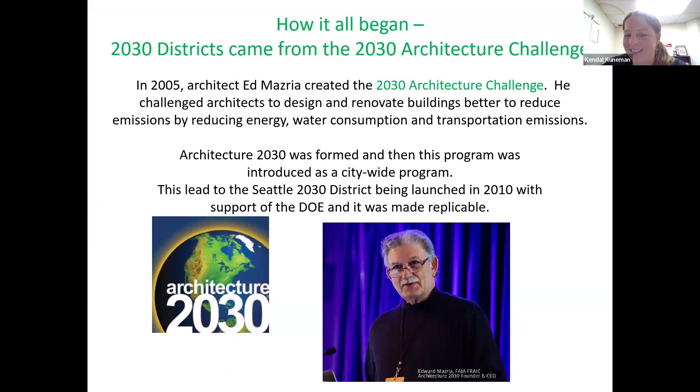There's over 602 million square feet that have committed to reducing their carbon emissions by half by 2030 that are involved in these districts. In Michigan, we are really starting to lead the way. We now have 5 districts. Ann Arbor just recently expanded to Washtenaw County. Detroit, Grand Rapids, and Lansing is emerging.

And just a little bit more information again about us. We are a private-public partnership, and we have 3 different membership types. So if there is a building located in the city of Detroit, that building owner or manager can enroll their property into our program as a building member. We also have professional stakeholders like the 3 that are here today to present, who support us financially, support our mission. And we also have community stakeholders, and these are other like-minded nonprofits in the city of Detroit that we partner with. So there's 3 different ways to join our program.

We somewhat recently launched a new program, which is an EV charging station pilot. And this is currently available to our building members. So if you are interested, you can reach out to us to get information.

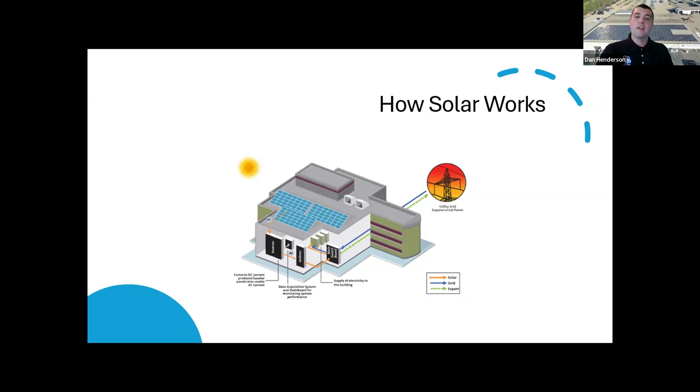From there, that power, like any form of electricity, I always like to joke, it's lazy, right? It's looking for that least path of resistance, i.e. what load or consumption can we satisfy or negate on site. So during those daylight hours, we want this solar array to produce as much power and send it into the building and be that primary source of power, with the idea that the utility during that daylight hour would then be your supplementary source. Again, site constraints do impact what kind of offset we can attain or realize. So every site is certainly unique. Depending on system size, there's also the ability to sell that excess generation back to the utility. We will unpack that a bit further, but that is what's known as distributed generation, which Michigan participates in.

Why are more and more Michigan business owners turning to solar? The benefits are compounding, right? The largest, and the one we see as most attractive, is going to be, hey, I want to mitigate my rising operational expenses. I would envision that the electric bill is probably one of the larger items on your balance sheet, and it's not one we like to pay. We like paying our employees because they're turning profit, right? They're going home and supporting their families, but that electric bill is ever increasing, even with the efforts that we're seeing. I would even challenge a lot of you to look at your homes. We're getting more energy efficient appliances and LED lighting and numerous things, but yet our electric bills are still increasing. It's as a result of that ever increasing rate.

We're seeing sustainability become a huge impact, right? So now we're finding that this is one of the larger low-hanging fruits of a carbon offset you can achieve by going solar. But I think one thing that is often missed is the marketing. I've touched on this before, and I still think it has an unbelievable opportunity to really separate and differentiate yourself. I've used the example in the past, we're working with a brewer up in Mount Pleasant, and their goal was, because it's a college town, I want to have the greenest green beer on St.

Patrick's Day. And I drank that beer.

But there's a lot of other things here we see, with compliance being another one, right? My largest customers are encouraging that they have sustainable suppliers. I've heard things like, hey, if I don't go sustainable or renewable, I'm not going to lose my relationship with my largest customer, but I may not be awarded new contracts. So we're seeing a definite evolution here as a direct result. Again, I touched a little bit on this: it's a large opportunity to reduce your carbon footprint.

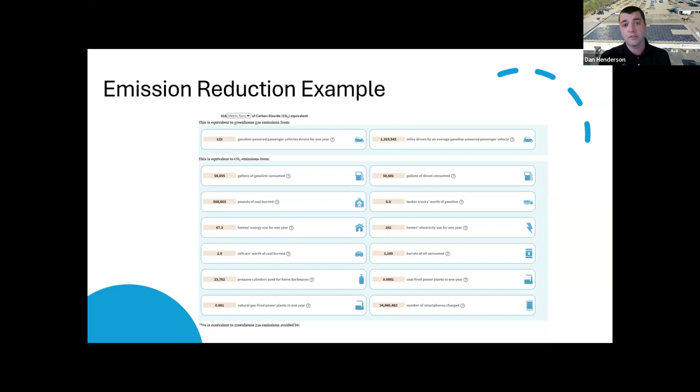We now have the ability to participate in distributed generation up to 550 kilowatts AC. This means, where we were going up to 220 systems, we can now see a system installed at closer to 800 kilowatts DC and still be able to participate and sell that excess generation back. Because one thing we observe here in Michigan is heavy seasonality. The winter months, January, February, November, December, those 4 months equate to about 15, maybe 20% of your annual production. So we're optimizing these for the spring, summer, and fall seasons.

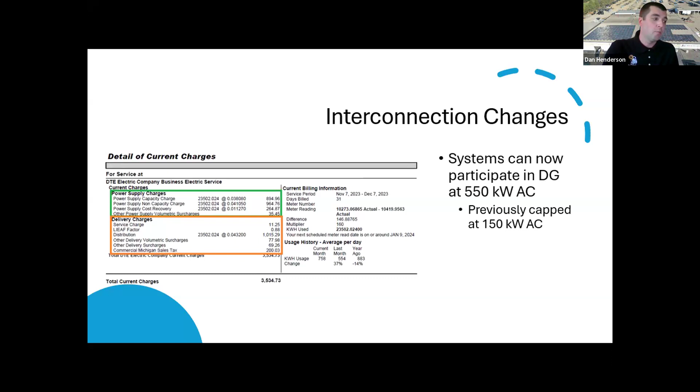Well, now the credits that you generate can also be applied to the delivery charge. Anywhere that you see a volumetric charge, in this case the 23,502 kilowatt hours, we can first and foremost reduce the demand from the utility because you're sourcing it on site, and any excess that you can't consume in that moment will be sold as a credit and further reduce this electric bill. So what we're going to start to see is smaller banks of credits, because we're ultimately going to observe smaller electric bills. So this is good news all around, because more of your power you can apply to your billing.

Now the incentives. Solar has always been a pretty incentive-friendly project. We're really excited. There's a federal depreciation, typical 5-year schedule, a state level depreciation, but the one we're most excited about was, thanks to the Inflation Reduction Act, a reinstatement at 30% as your baseline tax credit. This is for any for-profit taxable entities. There is a direct pay incentive, which is available to the 501c3s, the non-taxable entities, houses of worship, that we're very excited about.

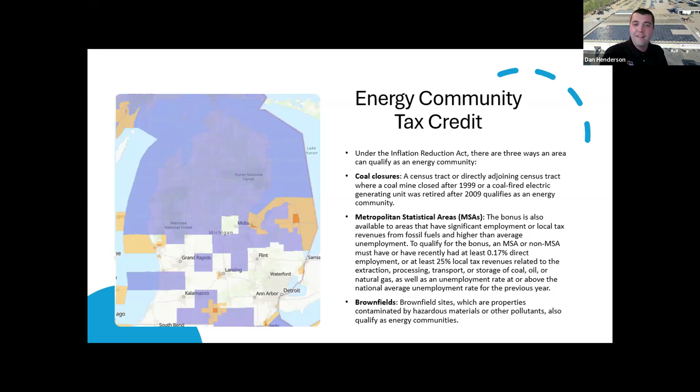We are extremely excited that there was recent guidance released, just a few weeks back, that actually expanded this credit. And now we've added 7 additional Michigan counties: Monroe, Wayne, Oakland, Macomb, Livingston, Lapeer, St. Clair. It's really exciting to go back to some of the customers I have been speaking with and see the impact on the pro forma itself by adding this additional incentive. This is compounding on the 30% and depreciation that are already in place.

It is also important to know that this list of those that would potentially qualify for future years is dependent on those local unemployment rates. So we could see some of these drop off or get added. It'll be interesting to see how these look going forward. But we're really excited to see this credit expansion. It further supports the development and growth of renewable energy here in Michigan.

I'd be remiss if I didn't end with a case study. So I'd like to share Willie's Overland Loft. I'm really excited to share this one, because as Kendall had mentioned, we were at the Michigan Energy Summit and Battle of the Buildings in Grand Rapids yesterday, and our friends over at Willie's Overland Loft were recognized for further reductions since we've installed solar, with all their positive efforts. So kudos to that team. It's really great to see all that they're doing and continue to do.

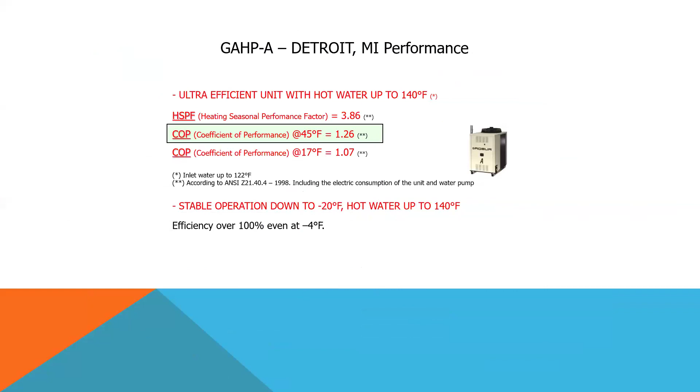This pilot information comes from natural gas energy providers in Northern Illinois, which is very similar to our climate in terms of heating degree days. They wanted to try a heat pump in a northern exposure, where heat pumps aren't typically applied. When you say heat pump, they don't always have to be geothermal, they can be air to water, water to water, or whatever. Ours happen to be air to water, and they run on natural gas. When we compare the degree days of Rockford, Illinois, where they did this testing, to Jackson, Michigan, they're very similar within a few hundred degree days of each other, so we thought it would be a relevant comparison.

Why do I want to share this information? Right now, everybody thinks electrification of everything is going to be great, and it will be when we get clean power, but right now we're still fairly dirty. So we want to talk about what today's reality looks like. If we put a gas heat pump in Detroit and let it run here, we can get water as high as 140 degrees out of it, hot enough to heat most buildings if properly configured. You can see we're above 100% effectiveness with the energy we're consuming, electricity and gas combined, achieving a positive impact. We're generating power through the use of ambient energy in the air with natural gas and a small amount of electricity, and in this test they were comparing different technologies.

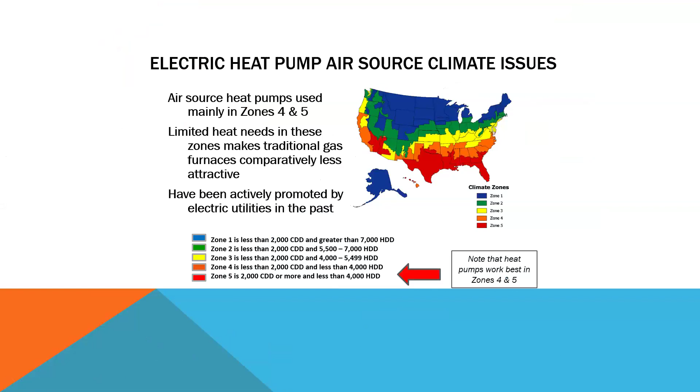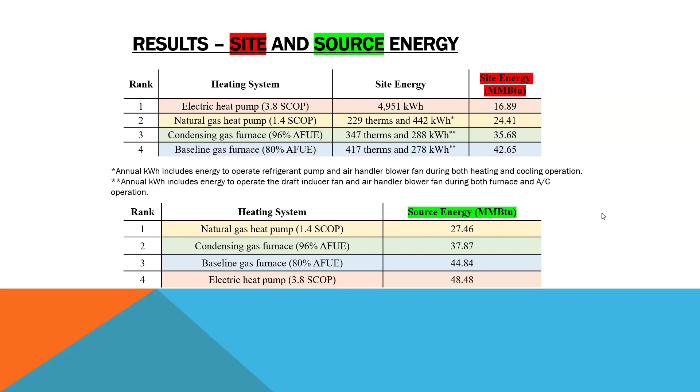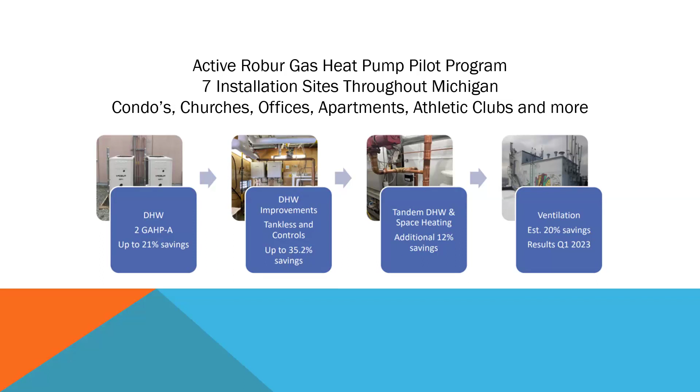We think it's a good application for domestic hot water because they use a lot of it. We're doing a couple DTE pilots and Consumers, one here in Livonia that just came online, where we're heating a pool for an athletic club and heating domestic water. And then we're doing another one in an apartment project, where we're going to make some domestic water for them as well.

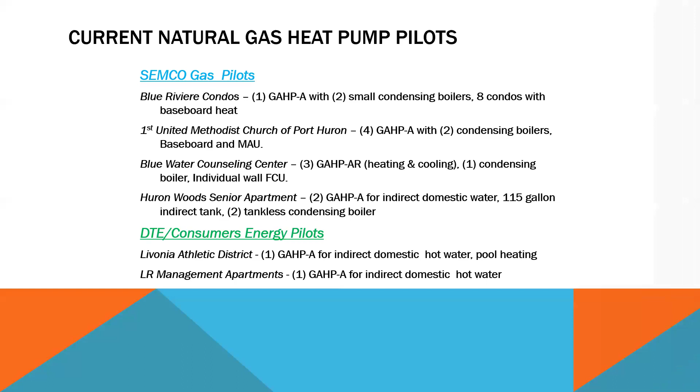So it's a little bit tough. They've got a lot of wind component, which is nice because that's the kind of stuff we want, but we need a lot more of it to make a bigger dent in the impact. When you see that spread out, natural gas is going to be taking over a lot of the coal operations because that's an easier fix, an easier jump, but it doesn't reduce all your emissions. It gets your reductions down because you're better off burning natural gas than coal, but you're still burning a fuel and losing 2/3 of that energy in the process of conversion.

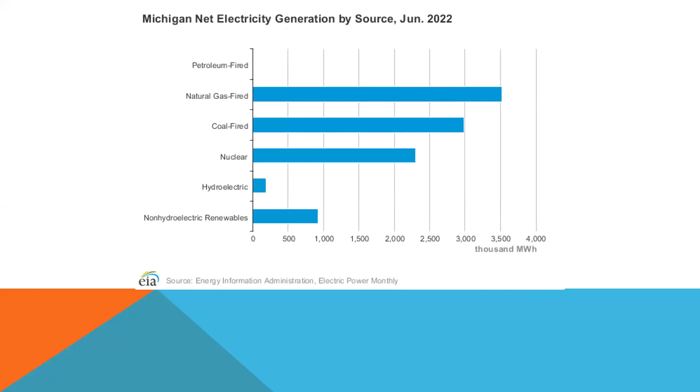One of the things that's unique about Michigan is we have the second lowest natural gas prices in the country. And the only reason we have the second lowest prices is the only people that have it less expensive than us are Louisiana and the other states that produce natural gas and ship it. We buy it when it's on sale - we're going to start buying natural gas like crazy in the summer here because we stick it back in the ground. We can do that. We have storage capacity that can hold more than a year's worth of capacity.

So that gives us a pricing advantage. It makes natural gas considerably less expensive than electricity, which is another factor working against our electrification goal, because people want the least cost option, and that is the least cost option for them. So we have to work around that. We'll get past it sooner or later, but right now, that's the reality.

Our electric prices, on the other hand, are on the higher side of the United States. You see residential rates are 15 to 20% bigger and higher than the national average. So that makes it hard for people to make that transition from getting very inexpensive natural gas to paying for very expensive electricity and using much more quantities of it than they're used to. So it's a hard transition, and it's one of the reasons people got excited about these heat pump pilots. We've done a large number this past year, and they're all in unique applications.

We're not just looking for cookie cutter, we're looking for diversity. And so far, we've been able to hybridize a lot of buildings to adapt to using heat pumps with supplemental heat or without supplemental heat.